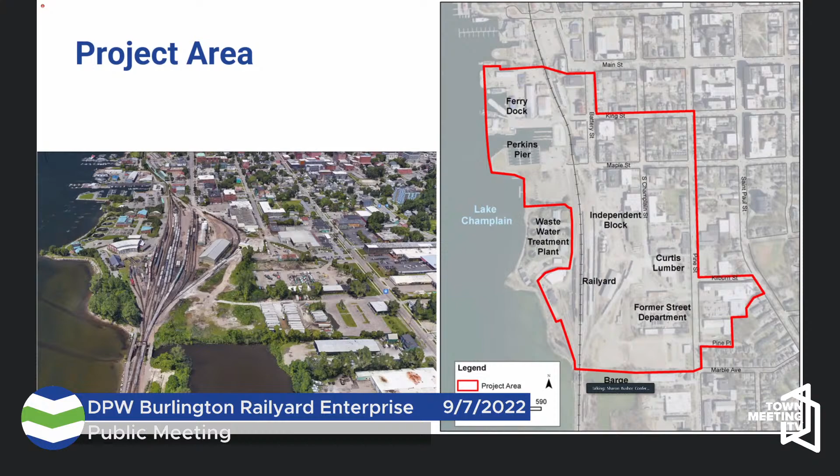So this is what the project is looking to complete. We have alternatives that were, through the initial PEL and the supplemental PEL, narrowed down to 3 alternatives for the roadway alignment. These 3 are being evaluated on a number of categories, and it is also being compared against a no-build option. So we are comparing 4 options, 4 alternatives for this roadway in this process currently.

You have alternative 1B, which is the more direct connection of Battery Street to Pine Street with a South Champlain connection. You have alternative 2, which is more of a grid street network, with a very similar Battery Street to Pine Street connection, which would make a grid street with Kilburn near where the current Curtis Lumber is. And then it would have 2 additional connections to Pine Street further south in front of the 339 Pine Street property, as well as closer to Marble, in order to continue that grid street creation with alternative 2.

So like Corey said, those three alternatives were evaluated for several criteria in accordance with the federal process, including impacts to traffic, impacts to noise, air quality, environmental resources, including floodplains. We had to consider what the soils are underneath these properties. Many of these properties have contaminated soils. A couple of those alternatives come very close, in close proximity to the Barge Canal Superfund site.

Taking all those factors into account is leading us towards the selection of alternative 1B as the preferred concept, with the primary factors being the amount of additional infrastructure that would be built with 2 and 5B has marginal benefit compared to what the impacts would be, especially in relation to the contaminated soils in the area, as well as the potential issues that excavating near the Barge Canal Superfund site would pose. So that's leading us down the road towards 1B as being the preferred alternative.

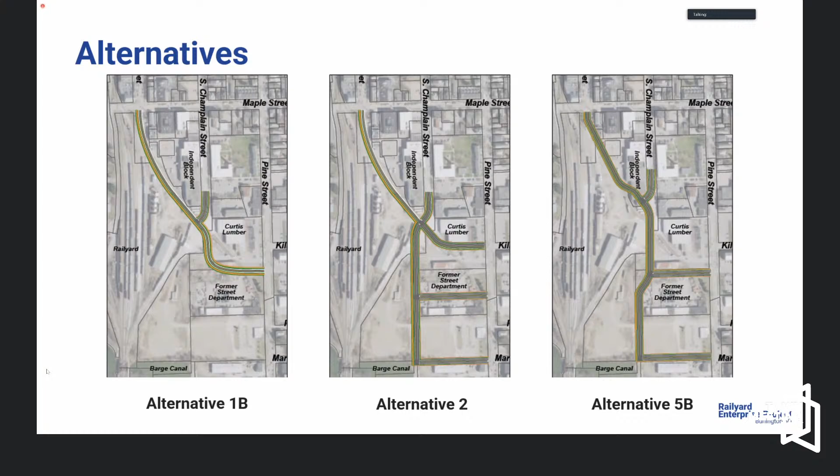So with alternative 1B, I'm just going to briefly walk you through the roadway alignment, starting down here at Pine Street. Here's the Railyard, here's Maple Street over here, South Champlain Street. Main Street's off the page, and the Barge Canal site is off the page as well. Starting at Pine Street, the new roadway connection would come through the northeast corner of the 339 Pine Street site, what we call the former street department site, currently being leased by CSWD, Resource, and Burlington City Arts members. This is a city-owned parcel.

And then the new roadway would come through the Curtis Lumber site, right now through the Curtis Lumber storage shed that's on site, and then continue on to the north into the Railyard parcel that's currently owned by the state of Vermont and operated by Vermont Rail System. And then through what is called the Independent Block property and through the southern portion of that building, continuing on through that site and then back into the Railyard, where it enters into the current right-of-way for Battery Street, and passes to the west of the Rambler building and the Waterfront Dive Shop, making that connection to Battery Street.

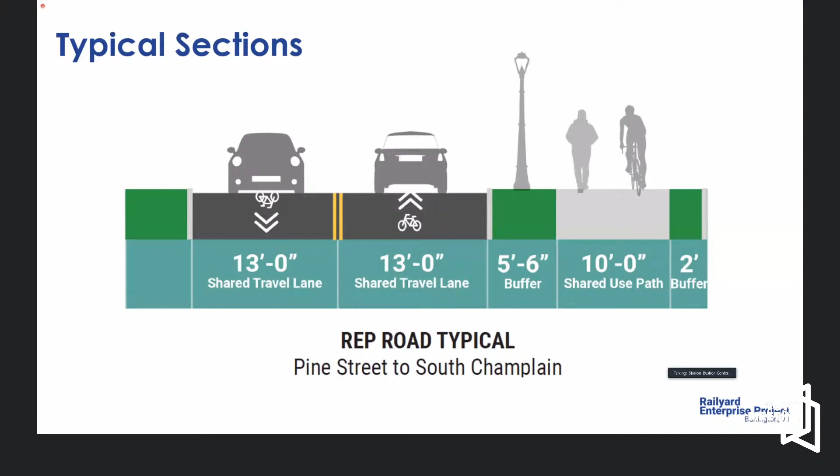So what we want to show is some of the typical cross sections. Again, these are conceptual ideas we're working with right now, and the exact dimensions outside of the roadway are still being worked on as we get further into the design. But typically, for the new roadway section between Pine Street and South Champlain, you're looking at a 26-foot roadway curb to curb, a 5.5-foot buffer, and then a 10-foot shared use path on the eastern or northeastern side of the roadway alignment, with an additional 2-foot buffer from those adjacent properties.

Then, as we get further between the South Champlain and Battery Street portion, you have the proposed railroad track alignment, and a 10-foot rail access area required adjacent to the rail tracks. There's likely going to be some sort of security fencing separating the roadway from the rail yard, and an 18-foot minimum offset from the center of that track to the edge of the roadway is a requirement. That's a large portion of why nothing can be proposed for pedestrian usage west of the roadway, for safety and logistical restrictions — that's why we don't have facilities on both sides of the road in this section.

You're looking again at the same 26-foot cross section, curb to curb. With this narrowing cross section, the width of the green belt between the road shoulder and the shared use path might vary, depending on what's available, as it has to navigate around physical structure limitations, such as the edge of the Independent Block building, which is not being proposed for removal, as well as the Rambler building, as it makes curves at the more northern portion of this roadway alignment. We're still looking to maintain a 10-foot shared use path for this whole corridor, with an additional 2-foot buffer on the property side. So this is the typical cross section we're looking at for this roadway alignment at this time.

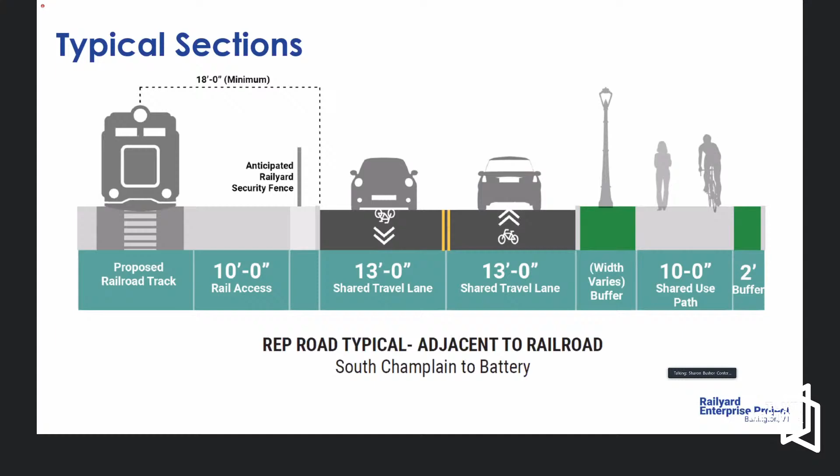This roadway is a standard typical Burlington road, a 25-mile-an-hour roadway. Through our design, we anticipate that the traffic would be maintained. The design itself does not promote faster speeds, as you have that serpentine kind of movement, as well as multiple access points between different parcels along these corridors where cars will be entering and exiting traffic. The shared use path on the side does cross a few more driveways due to the access likely necessary for those parcels, and coordination and further design is being worked on in those locations.

For this project, the next steps this fall: we're looking to go to council with hopefully the desire to have them on board with a preferred alternative. We anticipate the preferred alternative to be 1B, but we would present to council and get their feedback following public feedback today, as well as additional stakeholder engagements prior to the next available council meeting. We'd look for later in November to file the EA and formally submit the preferred alternative, then continue through the winter to gather further utility and design information to further this project into 2023 and beyond.

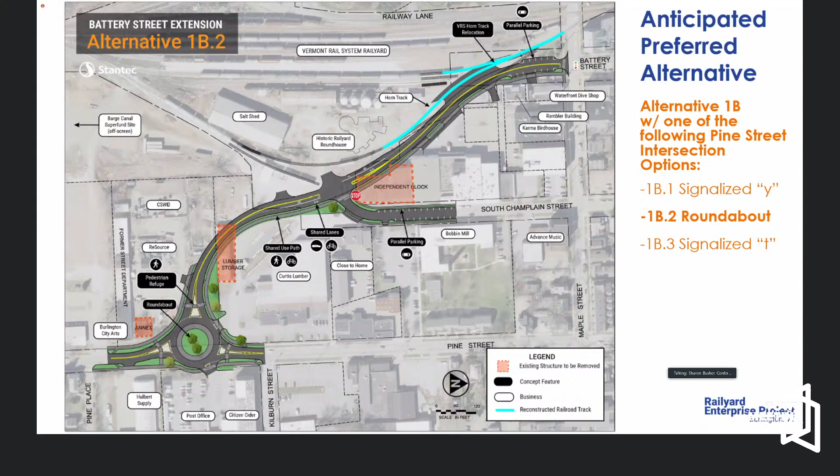We're anticipating approximately a 50% reduction in traffic north of the intersection on Pine Street. That said, there are slight nuances in terms of the anticipated volumes of traffic that each intersection would divert. We anticipate the signalized Y intersection to divert the most traffic toward the new roadway, with the roundabout in the middle, and this intersection diverting the least of the three. But keep in mind, it's the roadway that's driving that traffic diversion mostly, not necessarily the intersection configuration, and it's the origins and destinations on either side of the roadway - say the north end of Burlington connecting to the southern portion of Burlington and beyond.

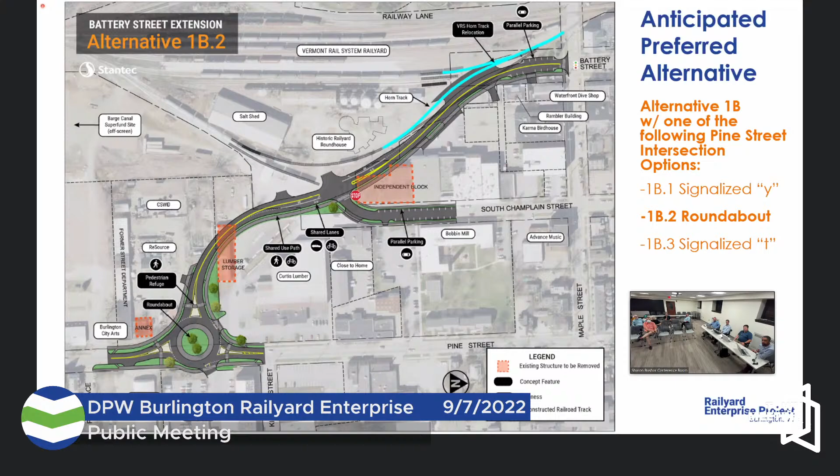So I think one of the things you want to focus on is the cross section. Maybe we can pull up a drawing of the cross section, but there is a 5-foot, 5'6" buffer space between the edge of the roadway and the shared use path. The shared use path dimensionally takes quite a bit of space to accommodate pedestrians and bikes. So I think there's an opportunity here for that buffer to build a level of comfort that you need to walk within that community, in that neighborhood. So I would want to walk on the 2-foot buffer side.

Yeah, okay, yeah, I understand. But you still don't have solutions in terms of whether it's going to be art, trees, or whatever that creates that 5'6" buffer. Right, and I realize you're trying to make it, from what you said earlier, a pleasant walkway with artwork, benches, whatever. But yeah, I don't know. It's not like you've got a shared use path that's adjacent to the curb, you've got cars blowing by you. You've got a 5'6" buffer, which is substantial.

Yeah, it just seems like it's going to be a fairly heavy traffic road, and that would be something that I would think most walkers would want to avoid, especially given that drivers really don't pay attention to us as pedestrians. Yeah, it's a behavioral issue that we try to deal with through design, but we don't have full control of how people conduct themselves, unfortunately. That's the challenge we have as engineers.

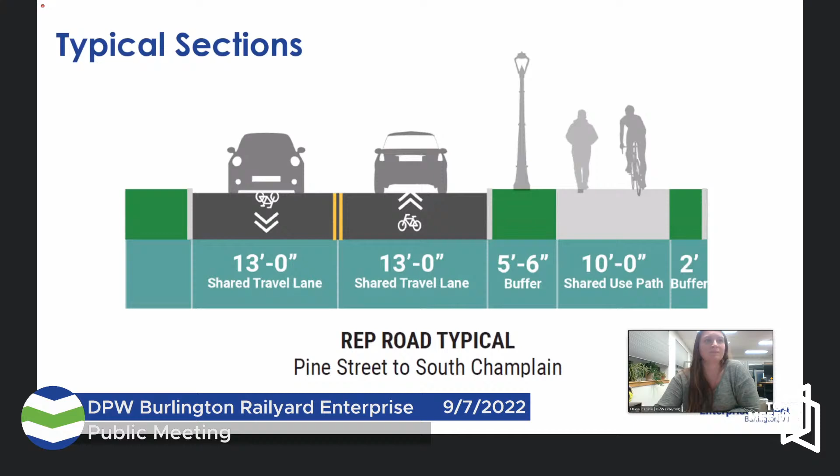Thanks, yeah, and actually could you go back to the map, please? Okay, awesome, thanks, or one of the maps. Thanks, thanks for taking public comment.

I just have a few comments here. As I wrap my head around this project, I want to ground everybody in the fact that with the climate crisis, we have to get as many cars off the road as possible. Transportation is the number one sector of emissions, it's the number one sector of emissions in Vermont, and personal vehicles is the biggest chunk of that sector. So whatever decisions are made should prioritize walking, biking, and public transit.

The other thing I notice looking at these maps is the building of new surface parking. If you just look at the eastern and northern parts of this map—the bottom and the right side—you see how much land in the biggest city in Vermont is spent on surface parking. And we know that incentivizes car use, makes the urban heat island effect worse, and makes our water quality in Lake Champlain worse because there are more impermeable surfaces. So we should do other things with that land instead of using public money on public land to build surface parking in the middle of the biggest city in Vermont. Those are my two main comments, so thanks again for listening.